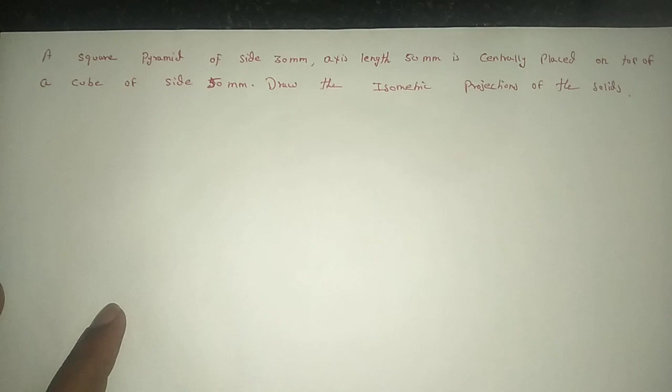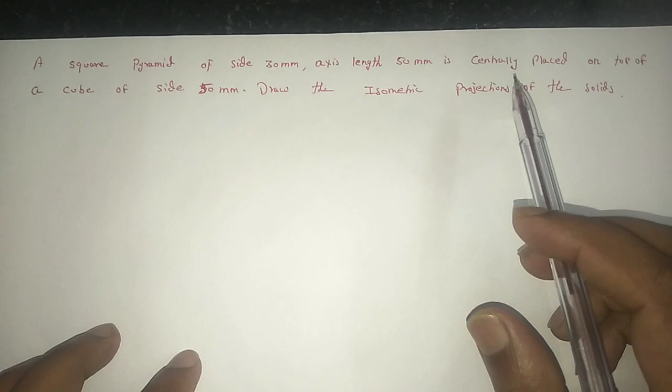In this video, we are going to see one problem from isometric projection. A square pyramid of side 30 mm, axis length 50 mm is centrally placed on top of a cube of side 50 mm. Draw the isometric projection of the solids. So, it's a combination of solids.

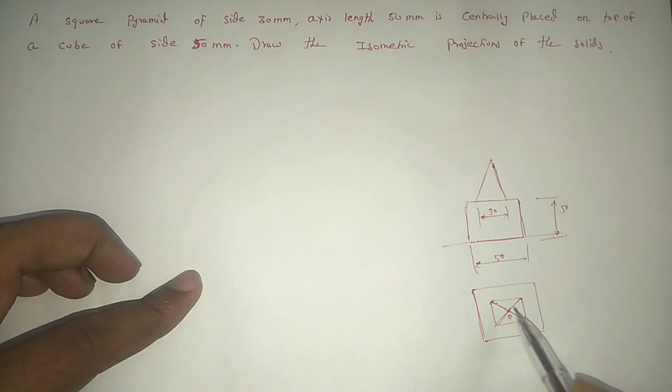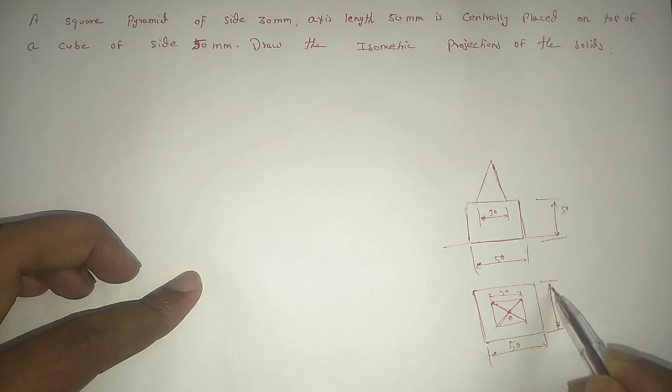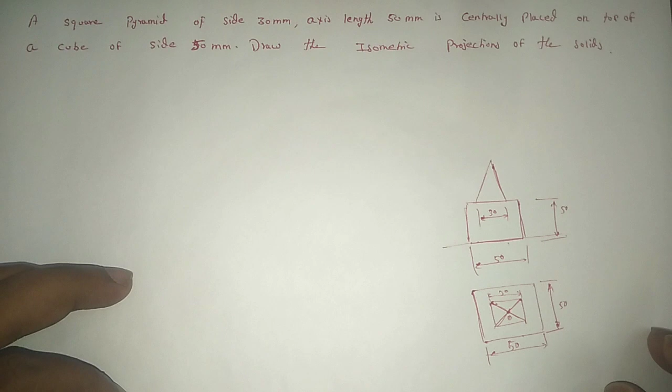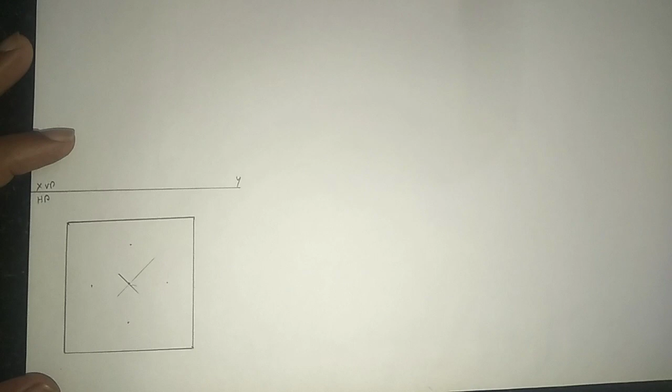And 50. So this one is the top view and this one is the front view. Now we are going to see how to draw the isometric view, isometric projection of the combination of solids. First, draw the reference line XY, VP and HP. On the HP, the top view of the object will come. So first, draw the cube, top view of the cube. Here the size is 50 mm. All the sides are 50 mm. And next, over the cube, we place the square pyramid. And here from the center

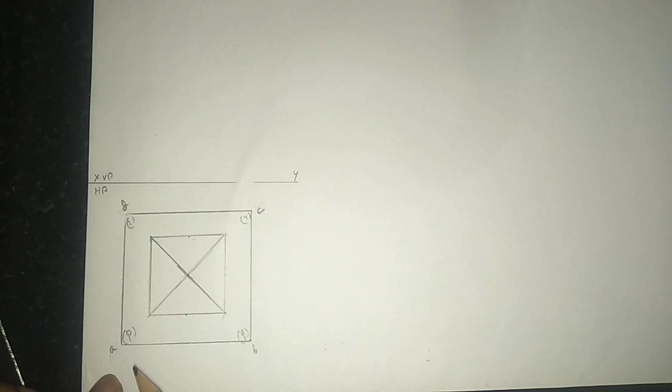Now it's a square pyramid, so we need to show the slanting edges. Connect the slanting edges. So this is the top view of the object. Here also we can give the names on the base portion of the cube. It is P, Q, R and S. It is invisible. And the top portion of the cube is A, B, C and D.

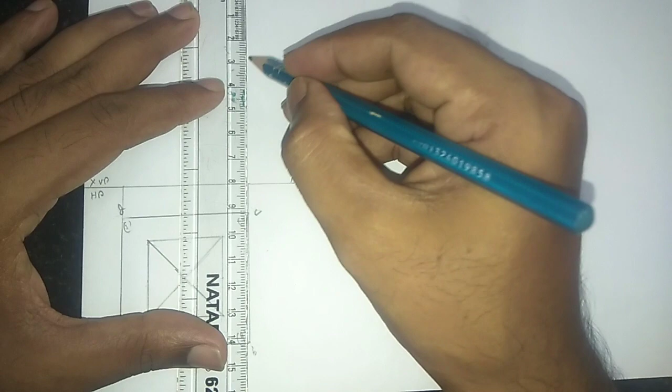Now we are going to draw the front view of the object on the vertical plane. So project the line from here, and here the height of the object from the reference line is 50 mm. 20, 30, 40, 50. 50 mm height, draw the line, and here also 50 mm, and complete the diagram.

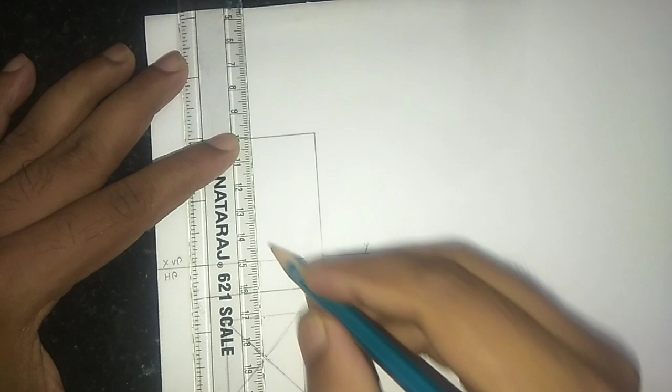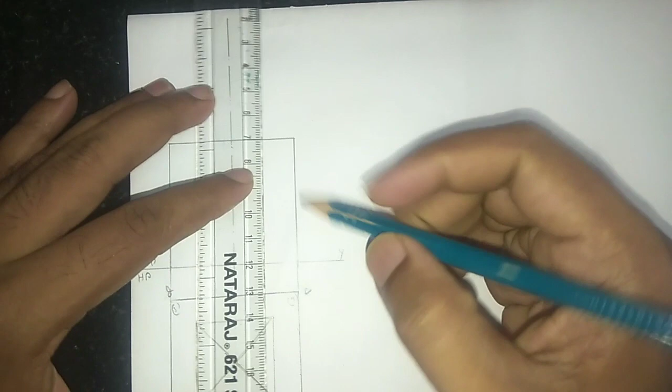So bring the projection of the square pyramid from the top view. So draw the projection line, and from here this is the base portion of the pyramid, and from the center line at the top of the cube, the height of the square pyramid is 50 mm. Mark the apex point of the pyramid, so this is O dash, and from here we connect the base portion of the square pyramid. And here also we mention the apex point O on the top view. Now the top view and the front view, the orthographic view is over.

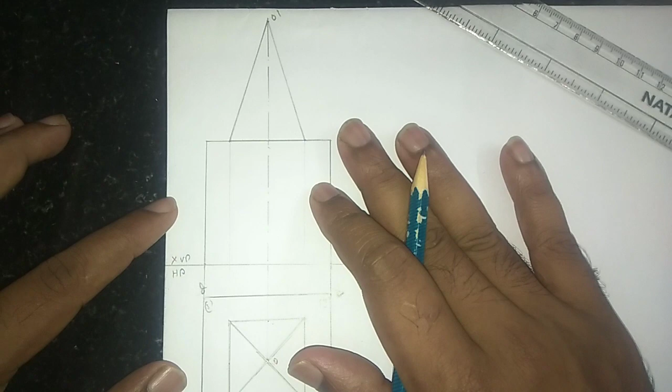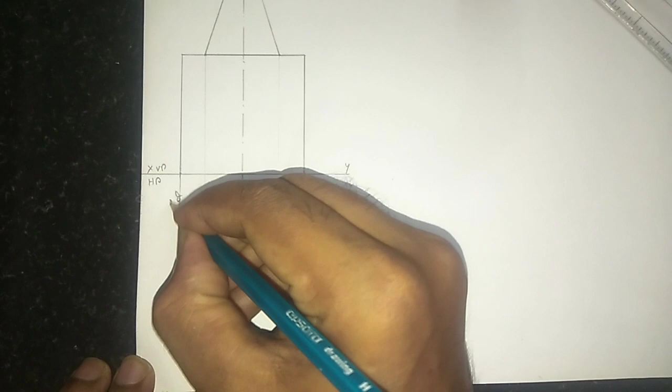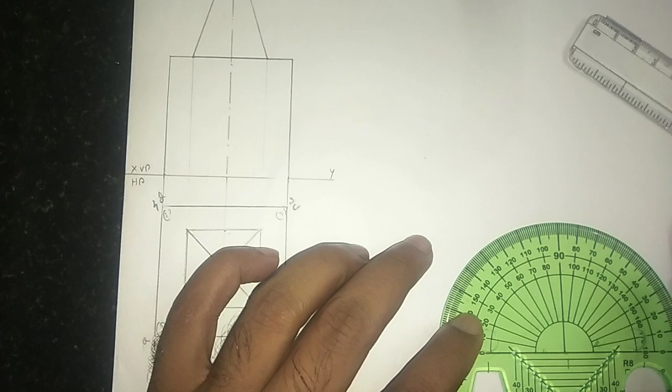Next we are going to draw the isometric view. To draw the isometric view, we need to accommodate this object in a square box. Here already it looks like a box. Okay, so here we give the number on all the corners 1, 2, 3 and 4. First draw the horizontal line, mark the center point, and this point number is 1, and at that point place the protractor and take angle 30 degree on both sides. Connect the points by a line.

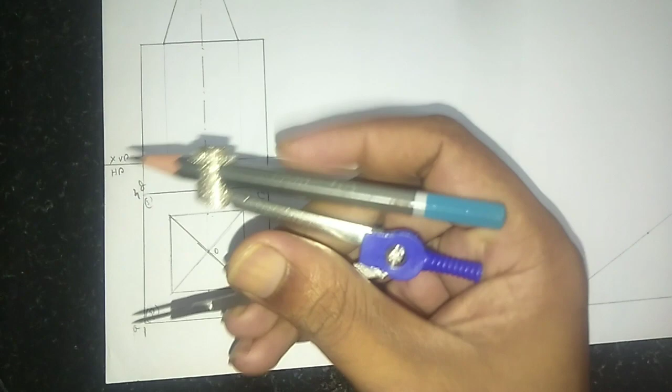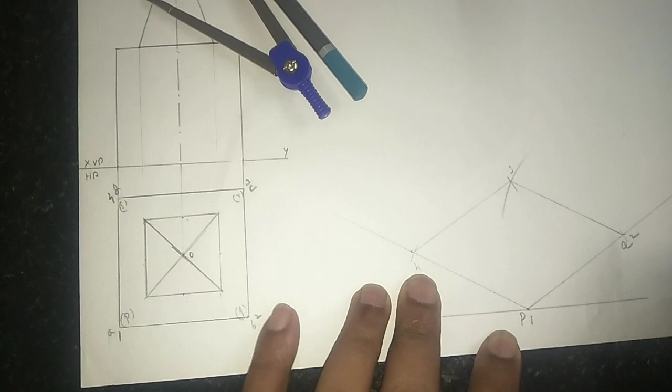And measure the distance of 1 and 4. Here the value is 50 mm. Measure the distance of 1 and 4 in the top view. Place the compass at point 1 and make an arc here, point number 4 and point number 2. Place the compass at point number 2 and make the arc. Place the compass at point number 4 and make the arc. So this is point number 3. Now we connect point number 3 and 4, point number 2 and 3. Now the base portion of the cube is drawn. At point number 1 it is P, point number 2 it is Q, point number 3 it is R, point number 4 it is S.

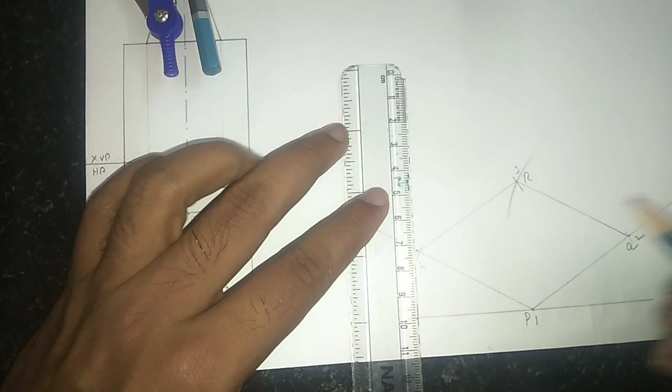Next we are going to draw the top portion of the cube. This is the base portion, bottom portion of the cube. To draw the top face of the cube, the height of the cube is 50 mm. From all the points, point number 4, draw one vertical line of height 50 mm.

From point number 1 also, draw one vertical line of height 50 mm. Point number 2,

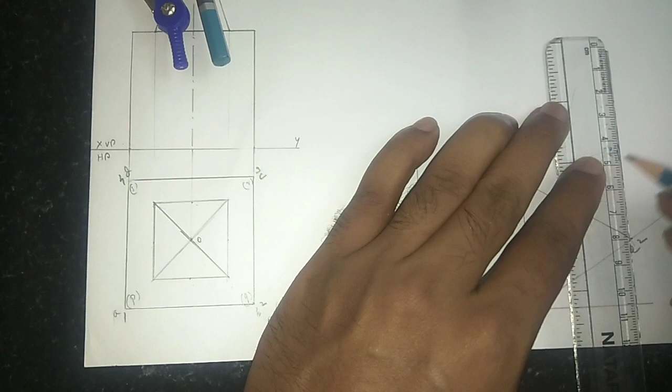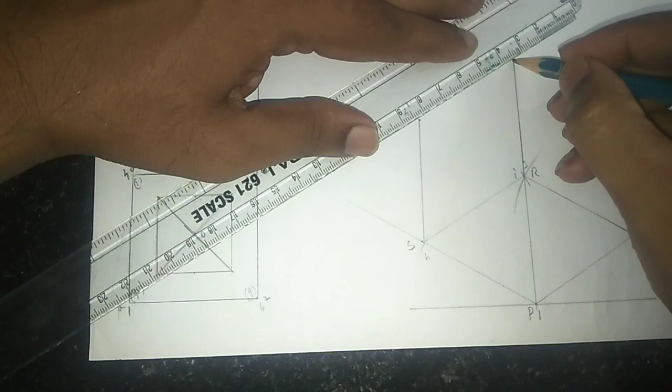And point number 3 also, draw a line of height 50 mm. So now this point is 4 dash, this one is 3 dash, this one is 1 dash, this one is 2 dash. Now we need to connect all the points 4 and 3, 2 and 1, 2 and 3 and 1 and 4. Now cube வந்து draw பண்ணியாச்சு.

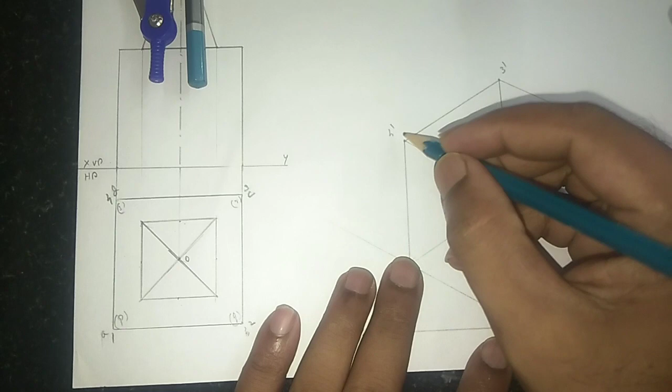Cube ஓட 3D view. This is the 3D view of the cube, and here also we give the name. Point 4 is D, point 3 is C, point 2 is B, and point 1 is A. And now we need to place the square pyramid over the top of the cube.

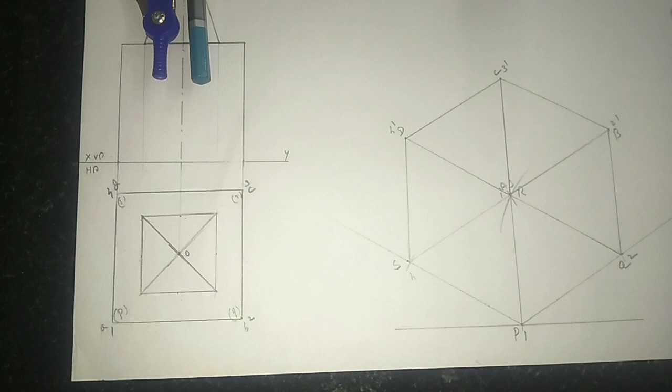It also looks like a box. So just give the numbers. So this is 5, 6, 7 and 8.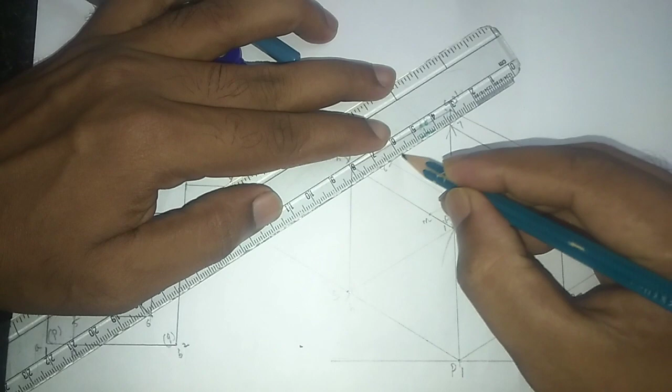Now we can connect. So this is point number 7. Connect point 6 and 7, 7 and 8. So now the base portion of the square pyramid is drawn.

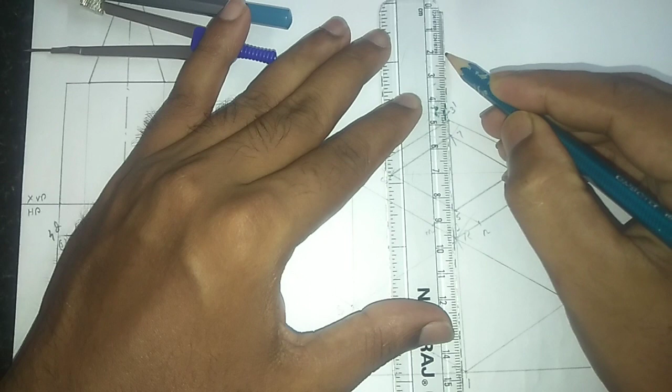Okay, so here the slanting edge will be visible. So first you mark the apex point. So this is apex point O. From that apex point we need to connect the corners. So O and 8 we need to connect, O and 6 we need to connect, and finally O and 5 also we need to connect. Also O and 7 is one slanting edge, but it is invisible.

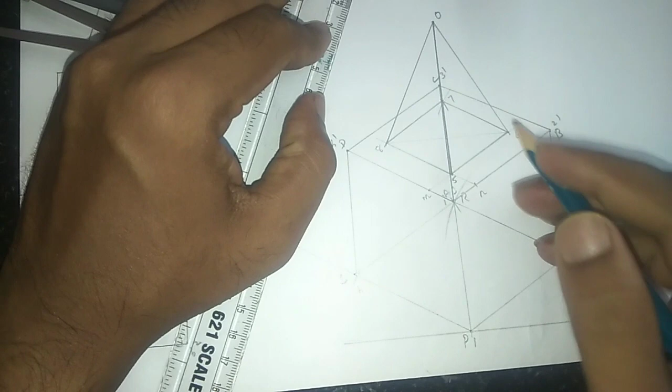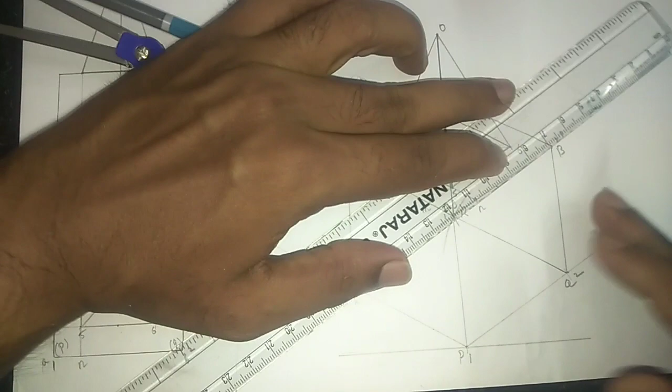So this is the final 3D view of the square pyramid. Now the square pyramid is placed over the cube. So this is the final isometric projection of the combination of solids. And here we may mention the dimension of the object. Here the height of the cube is 50 mm. We can mention here 50. And in the orthographic view also we mention the dimension.

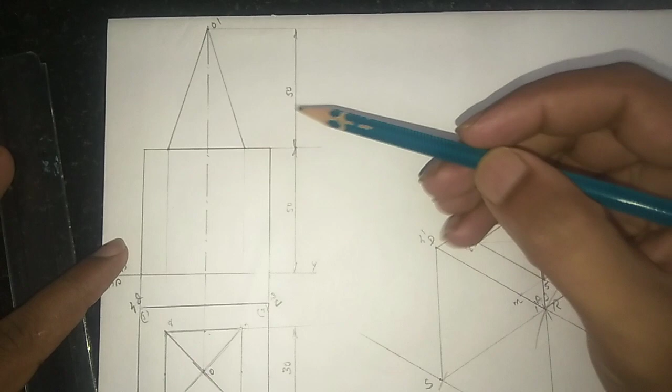So like this we need to draw and make the dimension. Here the height of the square pyramid is 50, height of the cube is 50, and the base side of the square pyramid is 30, and here also the base side of the cube is 50. So like this we need to mention the dimension. And at the bottom of the isometric projection we write all dimensions are in mm.

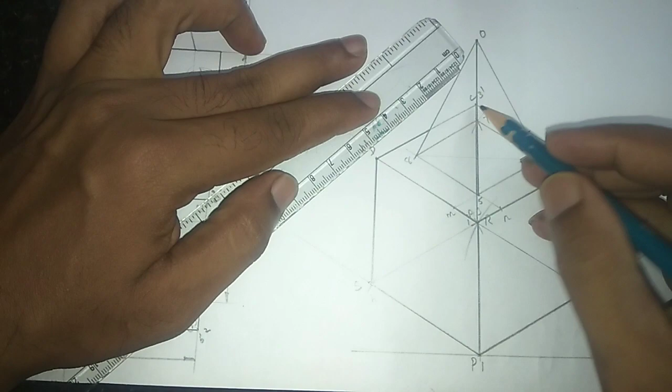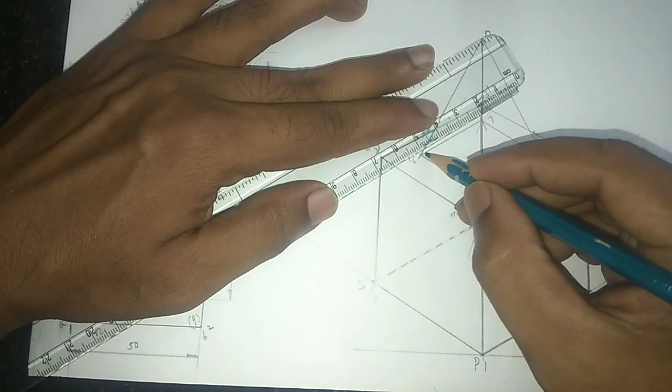And inside this line is also invisible, so we can mention it by a dotted line. Here also the inside portion is invisible. So we mention this line is also dotted.